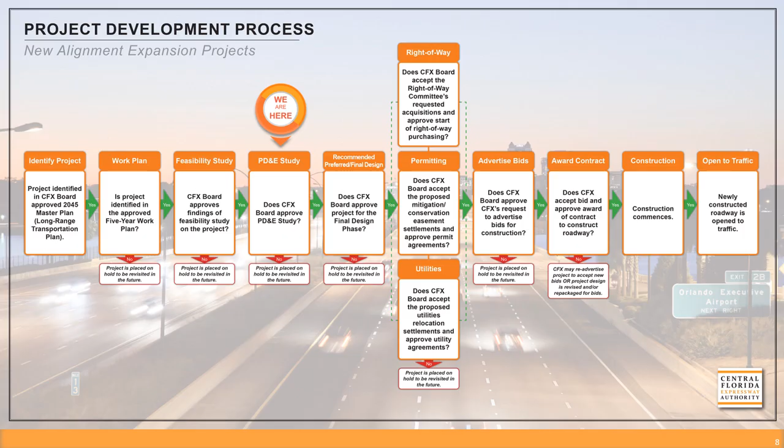The project development process followed by the Central Florida Expressway Authority for new alignment expansion projects is shown here. The project is currently in the PD&E study phase. At the conclusion of the study, after public input is received on recommended alternative concepts and based on Central Florida Expressway Authority board approval, the next phase would be the design phase. After the design phase are the right-of-way, permitting, and utility coordination phases. The PD&E study phase considers environmental effects during the alternatives evaluation process and provides an opportunity for input during the early stages of project development as alternatives are being considered.

In 2023, the Central Florida Expressway Authority completed a concept, feasibility, and mobility, or CF&M study to evaluate a new direct expressway connection between State Road 417 and the Orlando Sanford International Airport. During that study, 4 corridor alternatives were developed and evaluated, and each of these 4 alternatives was found to be feasible. This CFX PD&E study began in May 2024. The project team has been refining and evaluating the 4 alternatives that were recommended by the CF&M study team, plus a 5th alternative, an elevated viaduct that runs along East Lake Mary Boulevard.

Several studies have been conducted for a northeastern extension of State Road 417, but none of these previous studies determined the new expressways to be feasible. Most recently, the Turnpike is currently in the design phase for the widening of State Road 417 from 4 to 8 lanes between State Road 434 and Airport Boulevard. The CFX State Road 417 Sanford Airport Connector CF&M study was approved in 2023 with authorization to move to the next phase of project development, which is this PD&E study.

The study area for the current PD&E was expanded from the CF&M study to include the area for the viaduct option along East Lake Mary Boulevard and extends from west of State Road 417 to Skyway Drive to the east, and from the Lake Jesup Wilderness Area boundary north to Lake Mary Boulevard and the Orlando Sanford International Airport.

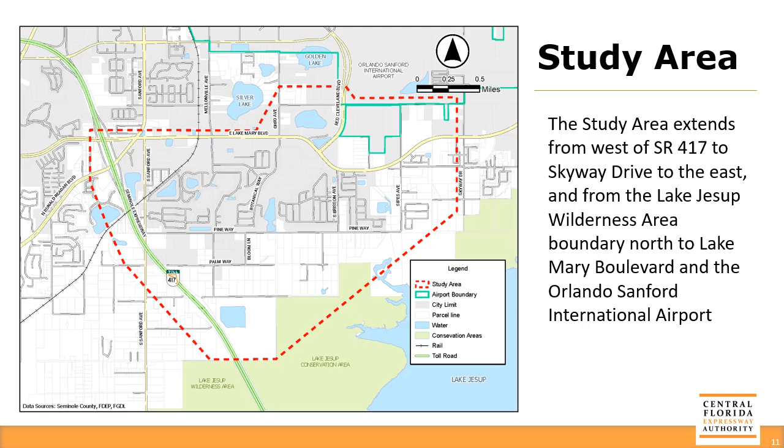The State Road 417 Sanford Airport Connector Expressway is being proposed due to expected increase in growth at the Orlando Sanford International Airport, the projected increase in traffic along East Lake Mary Boulevard, the projected population growth in Seminole County, and to support the planned development in the study area. Because of the ongoing development and growth in the area, East Lake Mary Boulevard is quickly approaching capacity, and there are long delays experienced during peak periods at the interchange with State Road 417 and at other intersections between State Road 417 and Red Cleveland Boulevard.

The purpose and need has been further refined during this study for the design year 2050, and the project is anticipated to enhance regional connectivity and mobility, address anticipated future traffic needs, support socioeconomic growth and planned development, and provide improvements to modal connectivity. This PD&E study is evaluating a new expressway connection from State Road 417 north of Lake Jesup to the Orlando Sanford International Airport. 5 alternatives were considered. Alternative 1 is the longest alignment and has the least direct residential and non-residential impacts.

Alternative 1 travels from State Road 417 south of the Lake Jesup Toll Plaza to the east and north to East Lake Mary Boulevard east of Sipes Avenue and connects at Red Cleveland Boulevard south of the Orlando Sanford International Airport. Alternative 2 is the shortest alignment and has the lowest potential environmental impacts of the 4 new alignments through the middle of the study area.

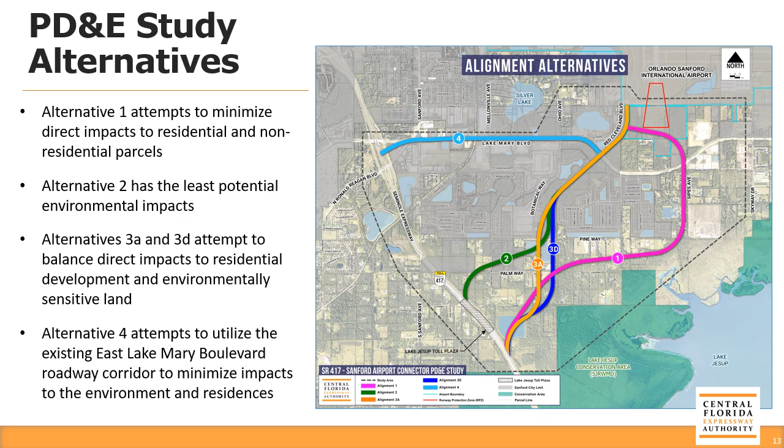The proposed connector typical section consists of a divided roadway with 2 15-foot travel lanes, a grassed 32-foot median, 4-foot paved shoulders, and 10-foot landscaping strips on each side of the roadway. Retaining walls run adjacent to the roadway and are separated from a wildlife fence by 27 feet of grass on each side.

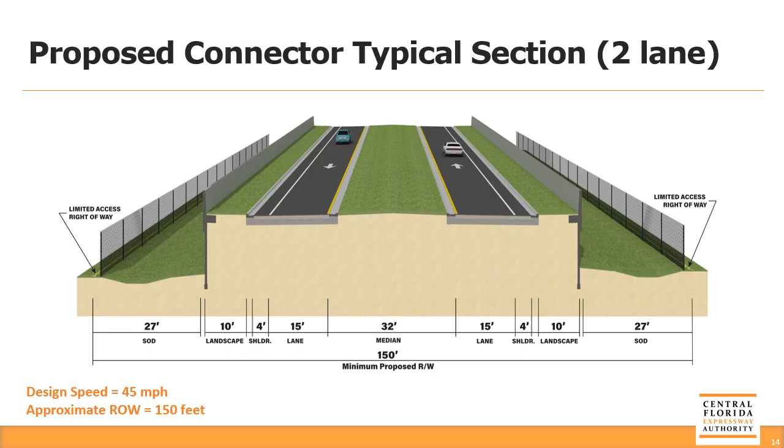The proposed bridge typical section consists of 2 separate bridges with one 15-foot travel lane, 6-foot 6-inch outside shoulder, 7-foot 6-inch inside shoulder, and a 1-foot 4-inch barrier on both sides of each bridge.

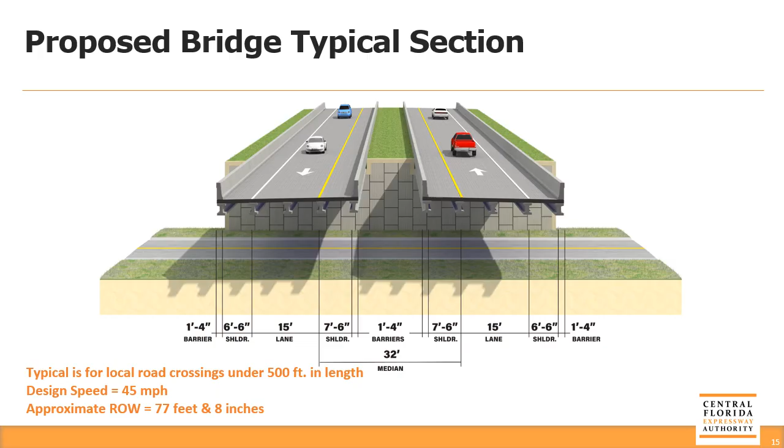Shown here is the proposed interchange with the potential airport connector at the airport entrance at Red Cleveland Boulevard. This interchange would allow for full access to East Lake Mary Boulevard and Red Cleveland Boulevard and maintain local access at the existing intersection. Drivers would be able to access the southbound proposed connector from Red Cleveland Boulevard or East Lake Mary Boulevard. Existing sidewalks and pedestrian facilities along East Lake Mary Boulevard and Red Cleveland Boulevard would be maintained.

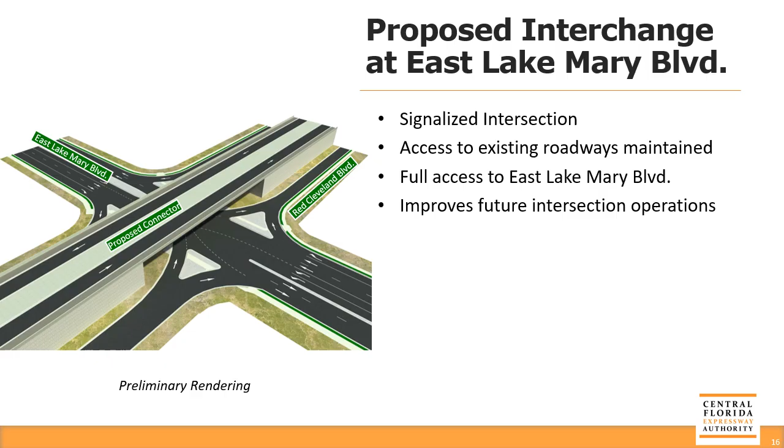Traffic analysis was completed to determine the future year 2050 daily traffic volumes on East Lake Mary Boulevard and the different airport connector alignment alternatives. By the year 2050, East Lake Mary Boulevard is expected to carry 36,700 vehicles per day. If Alignment 1 is constructed, it is projected to carry 19,800 vehicles per day and reduce the traffic on East Lake Mary Boulevard by 43% to 21,100 vehicles per day.

Alignments 2, 3A, and 3D are projected to carry 21,900 vehicles per day, which will reduce the traffic on East Lake Mary Boulevard by 46% to 19,800 vehicles per day. Finally, Alignment 4 is only projected to carry 8,900 vehicles per day, which will reduce the traffic on East Lake Mary Boulevard by 21% to 29,100 vehicles per day.

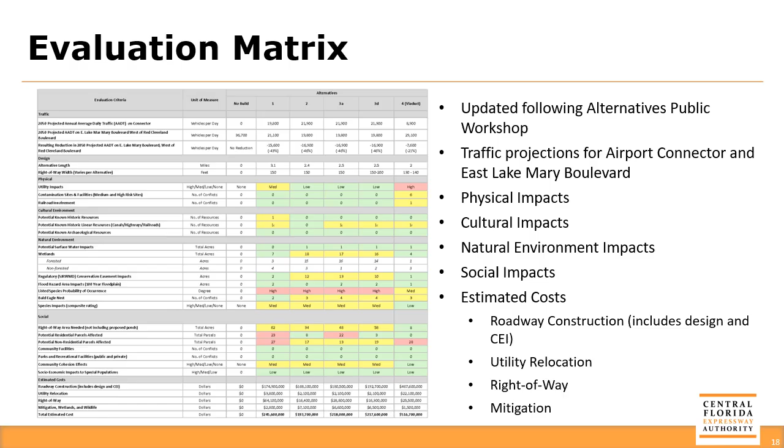An evaluation matrix that includes natural environment and socio-cultural criteria has been prepared to document the various impacts and costs for each build alternative along with the no-build alternative. The evaluation criteria includes traffic, physical impacts, cultural impacts, natural environment impacts, social impacts, and estimated costs.

This part of the matrix identifies the projected daily traffic volume on the airport connector in the year 2050, the projected daily traffic volume on East Lake Mary Boulevard in 2050, and the resulting reduction in traffic on East Lake Mary Boulevard associated with each alternative. It also summarizes the potential impacts to utilities, potential contamination sites, railroad, and historic and archaeological resources.

The viaduct alternative is projected to carry the lowest vehicles per day, which will also result in the lowest reduction of vehicles per day from East Lake Mary Boulevard. Other impacts shown here are pretty similar between alternatives other than impacts to utilities, with the viaduct alternative associated with the need to widen East Lake Mary Boulevard.

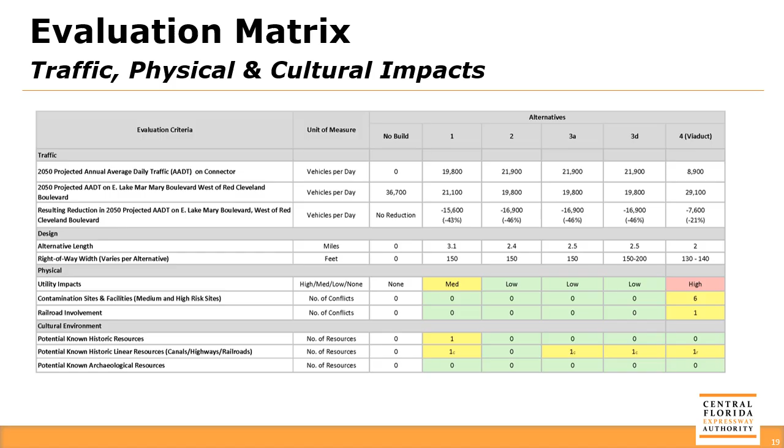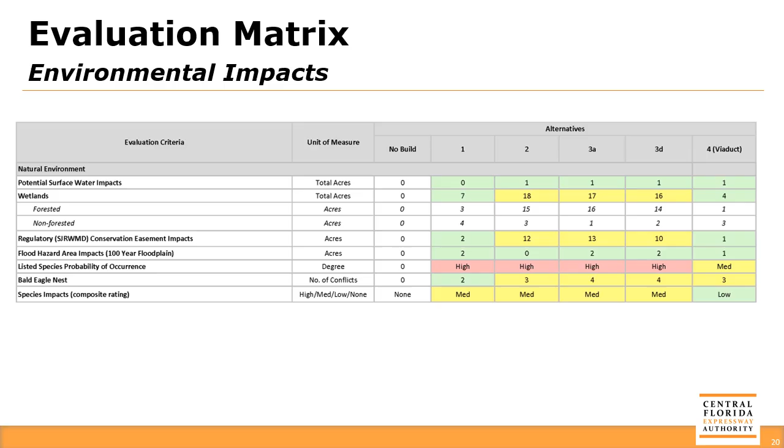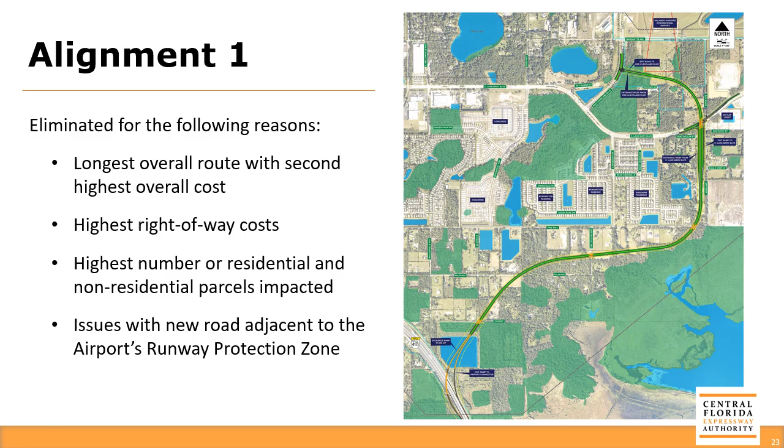Alignment 1 was eliminated for the following reasons: longest overall route with second highest overall cost, highest right-of-way costs, highest number of residential and non-residential parcels impacted, issues with new road adjacent to the airport's runway protection zone. Alignment 2 is proposed to be further evaluated. It's the shortest and most direct route, lowest overall cost, second lowest overall number of residential parcels impacted, connection to State Road 417 farther away from Lake Jesup Conservation Area than other alignments.

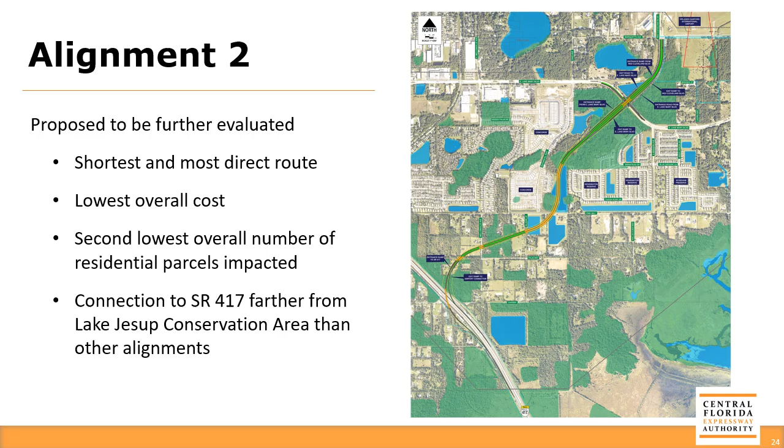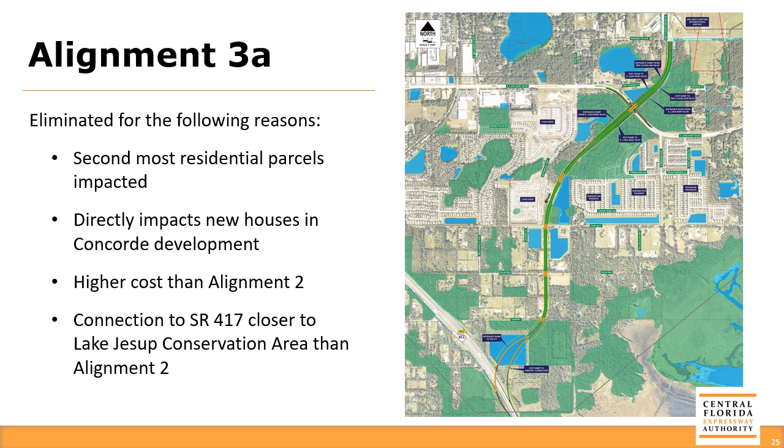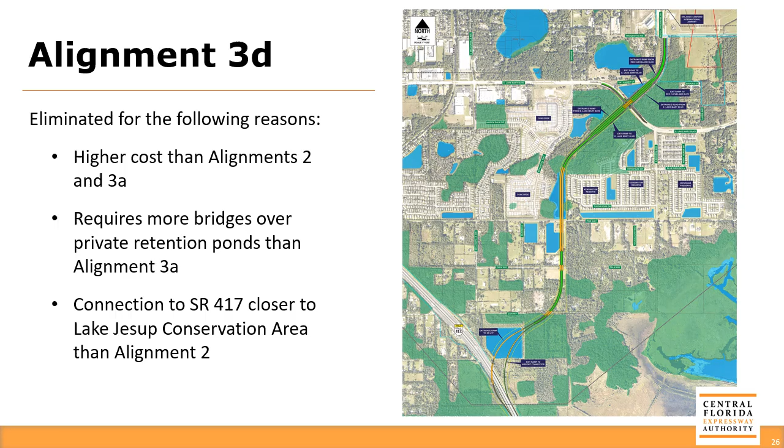Alignment 3A was eliminated for the following reasons: second most residential parcels impacted, directly impacts new houses in the Concorde development, higher cost than Alignment 2, connection to State Road 417 closer to Lake Jesup Conservation Area than Alignment 2. Alignment 3D was eliminated for the following reasons: higher cost than Alignments 2 and 3A, requires more bridges over private retention ponds than Alignment 3A, connection to State Road 417 closer to Lake Jesup Conservation Area than Alignment 2.

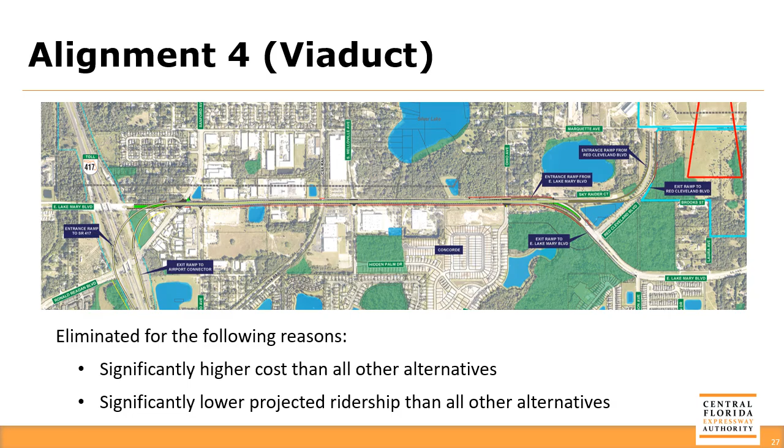Alignment 4 was eliminated for the following reasons: significantly higher cost than all other alternatives, significantly lower projected ridership than all other alternatives. As a result of the analysis completed to date, Alignments 1, 3A, 3D, and 4 have been eliminated from further consideration. A refinement of Alignment 2 is being considered that moves the connection to State Road 417 farther south, but still north of the Lake Jesup Conservation Area, to provide a more direct connection from State Road 417 to Red Cleveland Boulevard. This change was considered significant enough that it should be considered as a new alternative, designated as Alignment 2A.

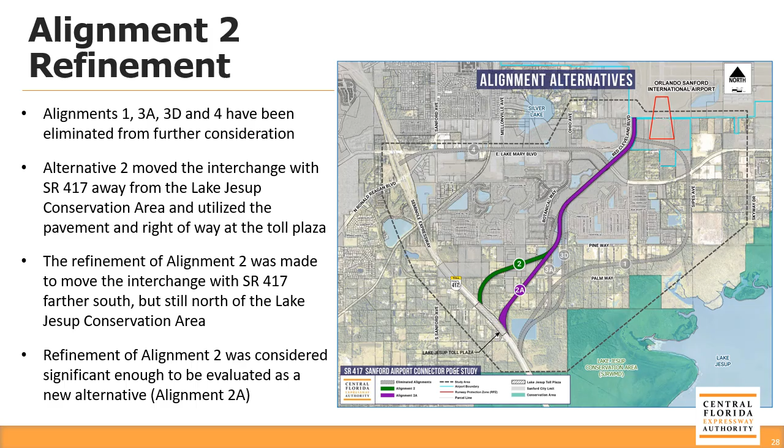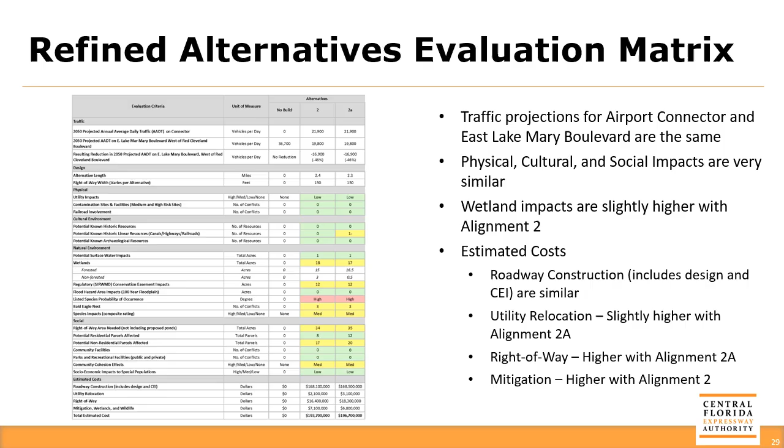A refined alternatives public workshop is being held right now to present this information on these two alignments to the public before a decision is made on the preferred alternative. The comparison between alignments 2 and 2A are very similar. Alignment 2A has less wetland impacts and mitigation costs, but has higher costs for utility relocations and right-of-way costs and will impact more residential parcels. Alignment 2A is better from a roadway geometry standpoint with fewer curves, improved sight distance through the curves, and would ultimately be safer than Alignment 2. Overall, Alignment 2A is estimated to cost $3 million more than Alignment 2.

Persons wishing to provide input can do so by visiting the study website or by contacting Nick Lully, the Public Involvement Coordinator for this study, at projectstudies@cfxway.com. Your input is important to us as we shape decisions that impact your community. We want to hear from you. Please take a few minutes to complete the survey and share your feedback.